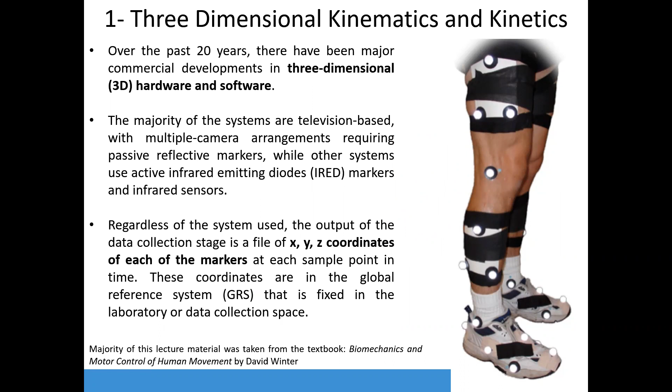So we need to have this X, Y, Z, and then we can find out the coordinates of a marker with respect to the system. And then I'm able to do all my calculations and analyze these markers' movement with the limb movements. Now, the problem is that when you look at the human musculoskeletal system...

Every limb would have its own coordinate system. Can you see this? So what I'm saying is there'll be a coordinate system for the foot, for the leg, thigh section, wrist, forearm, and then you have a coordinate system for all these body sections, right? And then you have a coordinate system of the leg.

So we need to, as I said, find a coordinate. For instance, if I'm interested in finding this coordinate about this axis, I can figure out maybe this is 2, 5, and 3, whatever. It's just a random number with respect to this.

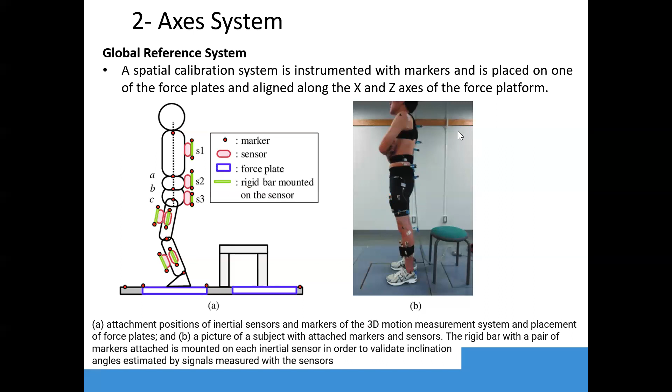We'll talk about sensors also sometime when you get time, but for now I was talking about this anatomical axis or the local reference system. Now, the local reference system or the anatomical axis system has to have its origin and also a principal axis.

So as I was telling you, the origin of the local reference system or the anatomical axis system is placed at the center of mass of the segment. Maybe I can go back again and show you what I'm saying. Can you see this? That's the origin of the local reference system, which is placed at the center of mass.

So if I'm talking about this segment, the center of mass would be here. I'm talking about this segment, and its center of mass would be exactly at the center.

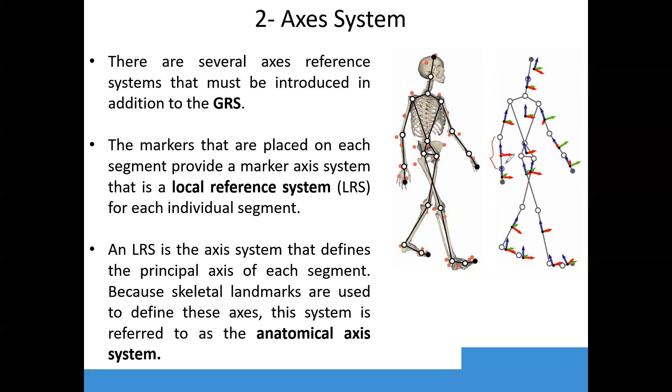The origin is kept at the center of the segment point. Now if you talk about the principal axis, let's say we're talking about the y-axis being the principal axis. This y-axis is usually along the long axis of the segment. So all those blue arrows in the previous slide denote the y-axis of the local reference system.

The principal y-axis is sometimes difficult to figure out. For instance, if you talk about the pelvis bone or hip bone, how would you determine the long axis? There, what we do is we try to join the PSIS and ASIS, the posterior and anterior spine points, the extremes. We take these extremes from the pelvis, connect them, and that becomes our principal axis.

So once we have those local reference systems, and we also have a global reference system, now we need to find a kind of mapping between global and local.

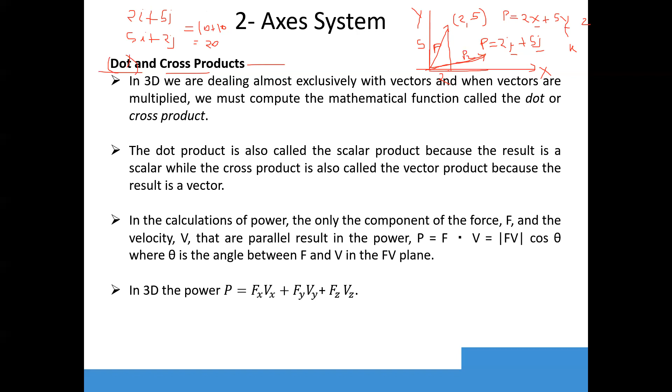But if you're doing a cross product, it's not that simple. For the cross product, let's move on to the next page. So for a cross product, I have to do something like this. Let's say we have those similar values where we had only i and j, 2 and 5, 5 and 2, okay?

Or let's say this time we got one more, k also there, okay? And let's say it is 1, 1. So when there's a matrix, we use this kind of bracket, but to find the value of the matrix, you only draw two vertical lines, and it's called determinant, because we are trying to determine the value of the matrix. So this kind of expression is called determinant A. Okay, I hope you understand this determinant.

So this is a determinant, and finding the values, the answer would be, as I said, again a vector. If you multiply two vectors in a cross product fashion, you get another vector. This time for i, you need to hide these two, and then multiply 5 with 1, and then subtract 2 times 1.

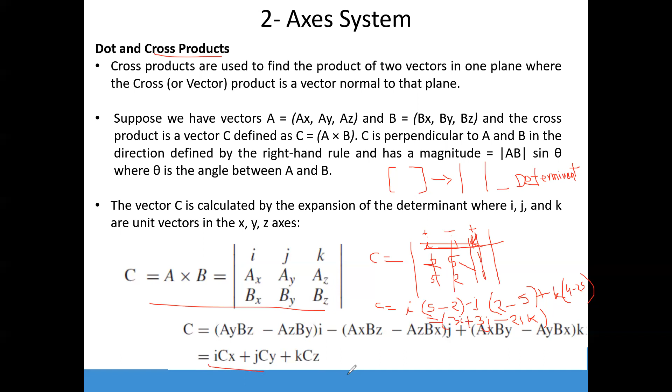So eventually what you get is a vector which can be defined as 3i plus 3j minus 21k. Simple, isn't it? Oh, I've got some examples here.

So when you have, let's say, force and velocity defined as this, like 2x plus 4j, velocity defined as x plus 5y, the dot product would be multiplication of 2 and 1 and 4 and 5, added together, so it'll be 22 clearly. Okay, but if you're trying to...

And then you do the same thing for when you're considering i. You cross out the rows and columns where you have i, so it'll be 5 times 1 and 4 times minus 3, and similarly, okay, and you get another vector.

Now with this discussion, you have become an expert in vectors. If someone asks you how do you know vectors or not, you can easily say that yes, we know the vectors, and we can also multiply the vectors.

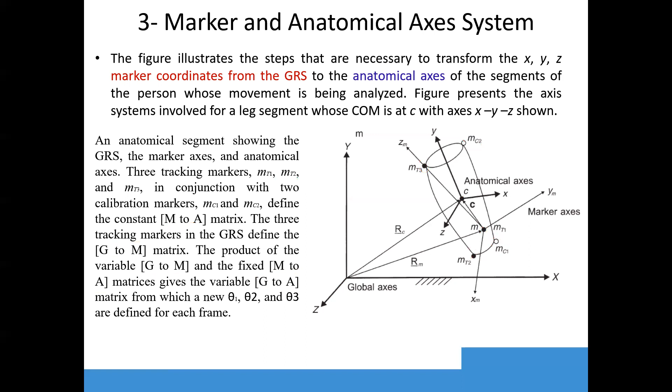It's the same story here, shown with this illustration, and it helps you understand that you have a global system, the marker system, and the marker axis. With this, you get the G to M matrix, let's say that's M1. And then from marker to calibration to the anatomical, you get the M to A matrix, let's say this is M2. Multiplying these two together, you get G to A.

So you can write G is M times A, where M is a multiplication of M1 and M2.

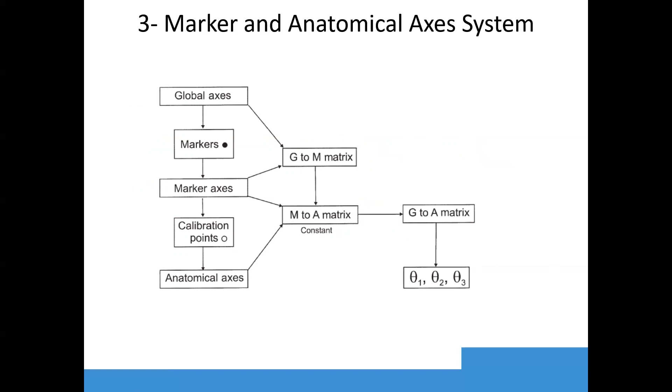So we do need these markers, the marker system, and the anatomical axis system information so that we're able to take whatever measures we've taken and put all these measures in one reference frame so we can compare them.

For instance, if you have a patient coming to you who cannot stand straight or whatever, with this information, using the markers' position, I can figure out where it relates to and where it should be, and then I can offset any displacement that exists with the disabled person.

Well, we were supposed to talk about the biomechanics. So this was all about the measuring. Let's talk about biomechanics that we wanted to study at first.

So there we actually try to find the interrelation that exists between the skeletal system, muscles, and joints. Essentially, we're talking about the upper limb. We may be interested in the shoulder joint, where we try to understand the clavicle, scapula, girdle, all that. Then it comes down to the humerus bone, then we have the elbow joint, and then we have the radius and ulna bones, and then the wrist joint and other bones.

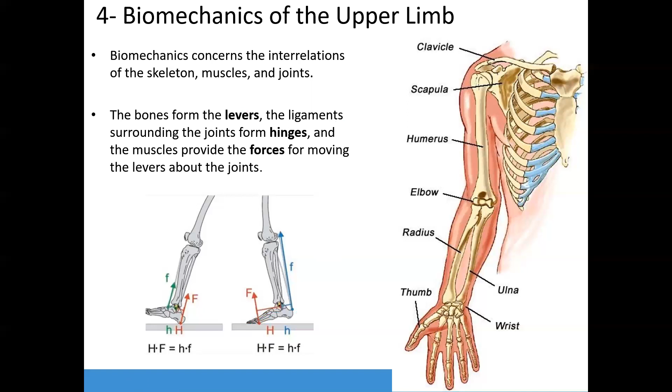These anatomical joints that I'm talking about are normally described in terms of degrees of freedom. For instance, if I talk about my elbow joint, I would say that because I can only rotate it, and that too in one plane, it has 1 degree of freedom. Of course, there's some abduction adduction as well, a very small amount, but we can probably neglect that. I'll talk about this, how much and why we can neglect it.

Now, for example, take your hand and grip. These interphalangeal joints, how many are there? They're again uniaxial, and because they can only move in one plane and one direction, they are again called 1 degree of freedom joints.

So why do we have this degrees of freedom concept? If I place something in space, it is said to be having 6 degrees of freedom, because something put in space can travel along x, y, and z directions, and it can also rotate about these axes.

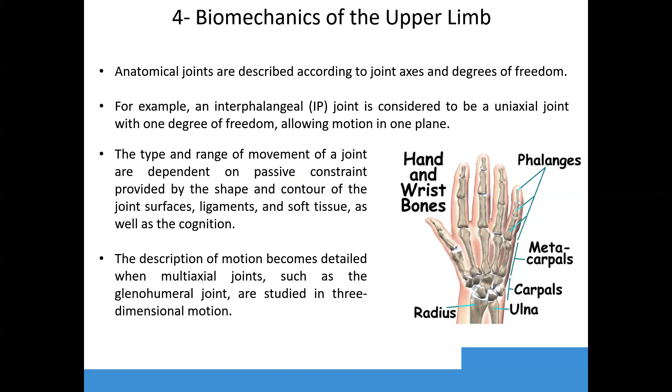Now, the description of motion becomes detailed when we talk about the multi-axial joints. For instance, if you talk about the glenohumeral joint, it's not easy, it's quite typically complex. Let's see here. This is your shoulder complex, which has both the shoulder joint and the girdle. So the entire shoulder movement is a result of the shoulder joint and the shoulder girdle.

Now, if you're talking about the shoulder girdle, it has clavicle and scapula. So the shoulder girdle comprises this clavicle joint, and there are 2 here, right? And it also has an ST joint, which is very difficult to actually explain, showing how your scapula glides on the thorax.

When you move like this, the scapula moves on the thorax, and this scapulo-thoracic joint alone has, I think, 5 degrees of freedom together with everything. So the SC and AC joints have 3 degrees of freedom each, so 3 here and 3 here again. Now the ST joint has 5 degrees of freedom, and it's very difficult to kind of quantify.

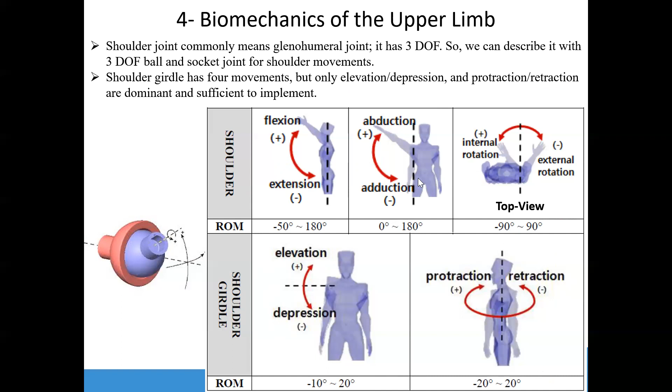So for instance, if I'm trying to use a robot for the entire upper limb, I need to look at the biomechanics. Here I've got 3 rotational degrees of freedom. I can only consider flexion extension here, and for pronation supination, together with this, I can also consider some abduction adduction. That should be fine. So we try to create such kind of equivalence with the exoskeleton things.

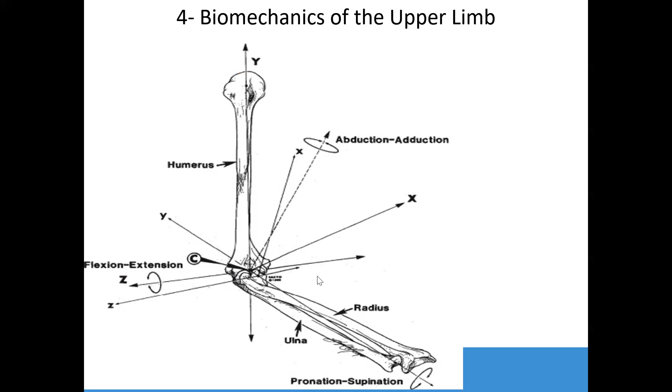So an exoskeleton creator should be something like this. Robots for upper limb rehabilitation are of 2 kinds: one is called an effector type of robot, the other is called exoskeleton. I'll explain later what effector robots are, but you know what exoskeletons are. Exoskeletons are robots attached to the human limb that have similar anatomy.

Towards the end of this lecture, we'll see some of the devices being used for upper limb rehabilitation. You would see the difference between the exoskeleton and the effector type of robots.

But essentially, any kind of robot that you're using for rehabilitation should be able to provide you the required motions of the upper limb, including the shoulder, elbow, wrist. For instance, the wrist motions can be both flexion and extension, and can also be radial and ulnar deviations. And you're able to move your wrist with pronation and supination with the help of the elbow joint.

When you talk about your fingers, they also give some degrees of freedom. As you can see, this distal, interphalangeal, and proximal ones - you get 1 degree of freedom at each of these. So that's how the total number of degrees of freedom for the hand becomes so large.

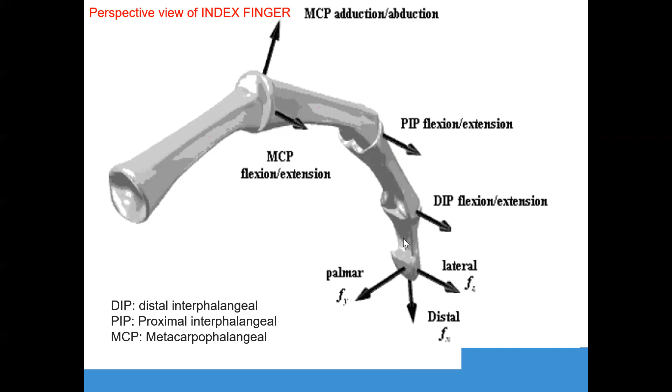So when we're studying the biomechanics of upper limb motion, we need to understand the difference between the normal arc of movement and the functional arc of movement. For instance, let's take the elbow joint, which has a normal arc of flexion extension from 0 to 150 degrees. And it can also give pronation and supination of 75 to 85 degrees.

Now, creating such kind of a robot is a nuisance. It's pretty difficult. We cannot create a robot that can give you such kind of flexibility. It's very difficult. And so, with studies, people have concluded that you don't need all this - you don't need the normal arc, whereas you only need a functional arc.

What does a functional arc mean? The functional arc is the one which should be able to provide you movements required for everyday life activities. So, for instance, instead of 0 to 150 degrees, you can only do with 30 to 130 degrees. So all you need is not 150 degrees of deflection, but 100 degrees of displacement from the robot.

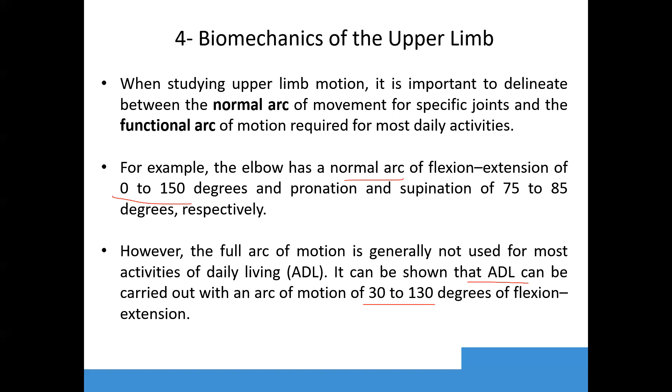Eventually it turns out that out of 150 degrees from 0, the functional arc would be close to 100 degrees of displacement.

And if you talk about pronation and supination, again almost equal amounts on both sides should be fine, like 50 degrees each. Instead of 75 on one side and 85 on the other, which makes 160 degrees, you could do with 100 instead of 160 degrees. So it's the same thing with forearm supination and pronation, because we normally use this for feeding or dressing tasks like tying a knot or whatever.

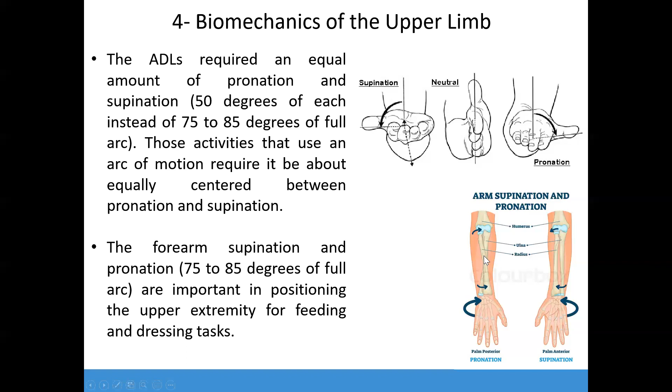This is for the supination and pronation. You can check and understand how, for different kinds of these tasks, the functional range is narrower than the normal range.

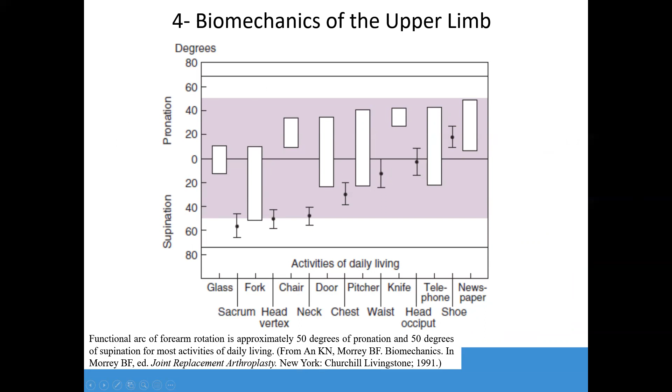Moving further, the wrist. If you talk about the wrist joint, it has a normal arc of, for instance, flexion of 80 to 85 degrees, extension of 70 degrees, radial deviation close to 20 degrees, and ulnar deviation close to 30 degrees.

So eventually they say the functional range of motion comes out to close to 70% of the normal or maximum range of wrist motions. Which means 40 degrees of flexion and extension, and put together radial and ulnar, you need 40 degrees.

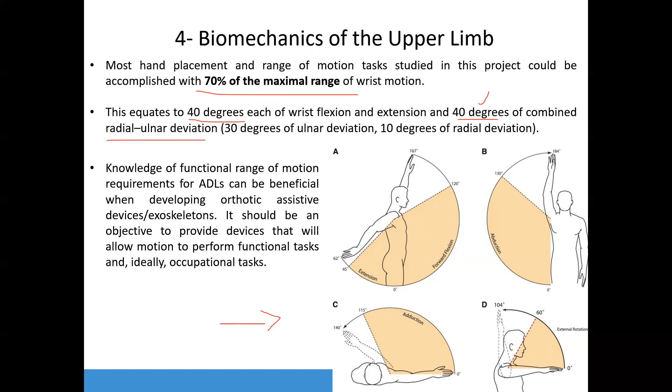And it's been shown here for the shoulder again - you can see how the functional space is less than the normal arc. For various tasks that you need to carry out, the shaded area shows that you need restricted movement and you don't actually use the full range of motion.

So during rehabilitation robot design, you can consider this, and that helps in easy design and comfortable use of these rehabilitation robots. Otherwise, sometimes if the range of motion is too large, and if you make an exoskeleton that goes far away, sometimes it's not possible to bring it back. And if it's not possible to bring it back, it's of no use.

We call it singularity postures. So there are certain singular postures or singular positions in the entirety of the workspace that we move our limbs around. We try to avoid those singular positions and points in the space, because if you take the robot to those positions, you cannot come back.

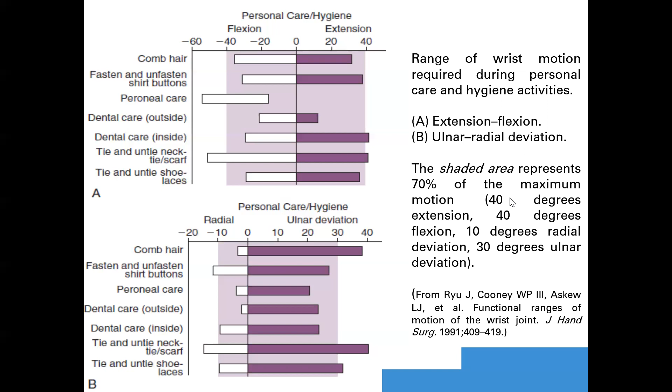This is also defined with the term called dexterity. I hope you know these terms - not all of you would, of course, but those who have difficulty understanding some of the terminologies we use here can try to read more about these definitions and try to understand.

So what happens once you have some sort of an injury? Injuries can restrict your motions, so for instance, a lesion on the upper motor neuron and then peripheral nerves may result in loss of volition control, motor control, sensation, and proprioception sometimes - the ability to balance yourself.

So once we understand the normal mechanics and the functional essential components of hand functions, there's something more that talks about special activities that need to be carried out, for instance writing or sewing, that also needs to be understood, because we need to interact with the patient and understand what exactly kind of work the person has been doing, and so what are the functional hand essentials for this person.

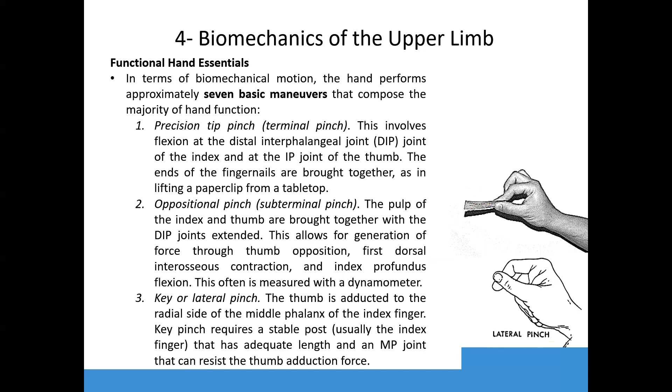And this is a lateral pinch, as you can see. You can pinch yourself sometimes to keep yourself awake.

And then you have directional grip like this, a hook grip, then a power grasp, and also a span or cylindrical grasp where the dip and the proximal interphalangeal joint flex to approximately 30 degrees, and the thumb is abducted. So these are those 7 functional hand essentials.

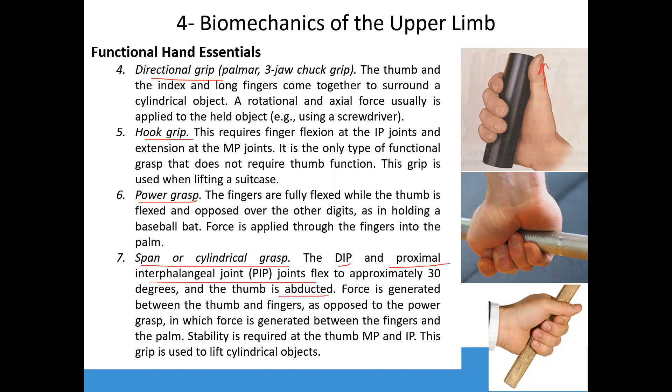But with injuries, some of these would get compromised, so even if you could work with just thumb and finger pinch and this palmar grip, you should be fine.

Upper limb stroke patients are normally miserable. They become disabled because of hemiplegia on either one side or both, and that results in weakening of the arm, and they cannot pick up or reach out or hold something. So the important goal for the person would be to improve arm movement and promote the recovery of lost functions.

Now what I'm talking about here is what happens when the person has a stroke. It eventually impacts the motor control. Rest you can do yourself. There's nothing important here, I can just skip. A few slides I'll be skipping quickly because it's for your information, and you can read and understand.

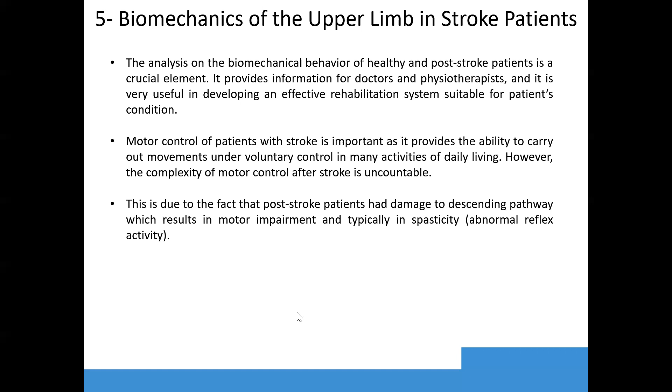So with the poor motor functions, what else? It may also reduce the sensory process, and so it makes it difficult to carry out all the everyday life activities.

Now the central nervous system is affected, and so the entire thing gets disrupted. The disruption would be in the form of restricted range of motion, loss of sensory functions, shoulder pain sometimes, and increased muscle tone. So muscles become very stiff and cannot move, and this results in pain.

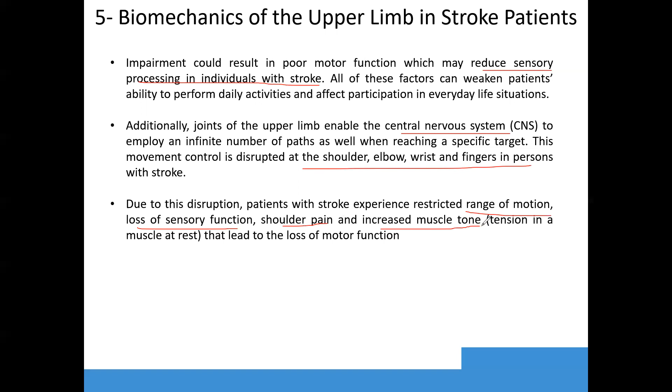Also, this is in terms of movements, and then in terms of torque, again, it is compromised. With the force applying capabilities compromised, the person cannot hold on to something, and so these are the basic motor functions that become compromised after a stroke.

Talking about the shoulder joint again, you have similar abnormalities that you come across, and so the major goal of rehabilitation would be the functional restoration of the person, reinstating the previous functions and strengths that the person had.

But I'm feeling like, okay, it's 11:25, which means we have done close to 1 hour. Let me come to a point where I can stop.

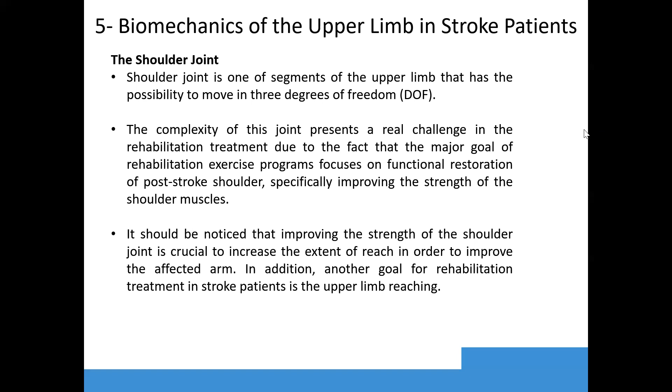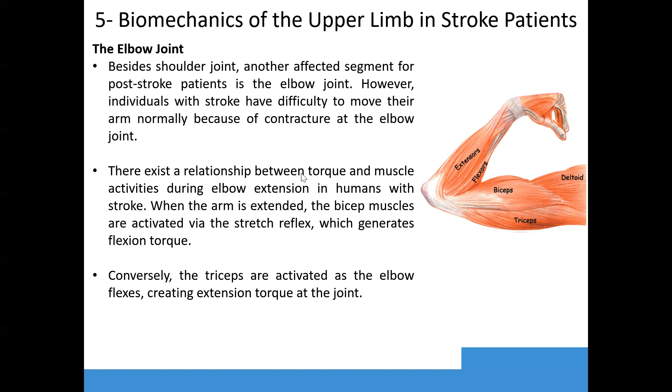And then of course the bones would be affected as well. I mean, bones are not affected by the stroke as such, but they're more affected due to muscle stiffness, and now you're not able to use the bones. So when you're not moving your limbs at all, this decreased use of your limbs results in osteoporosis, or sometimes it also results in bone resorption.

So while the bone was supposed to be absorbing calcium, it starts resorption, and it goes into the blood eventually. The calcium, instead of going towards the bones, goes out of the bones to the blood. So it does have an effect on the bones in some manner.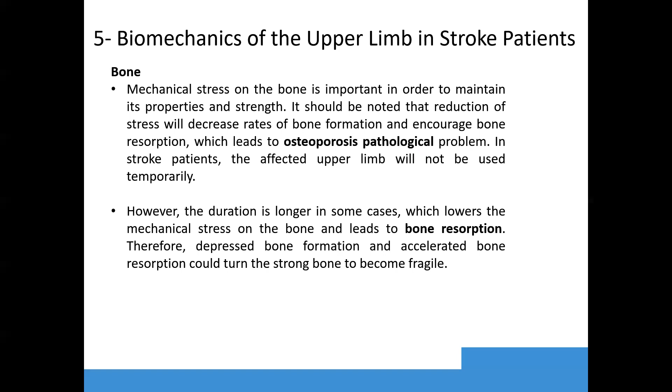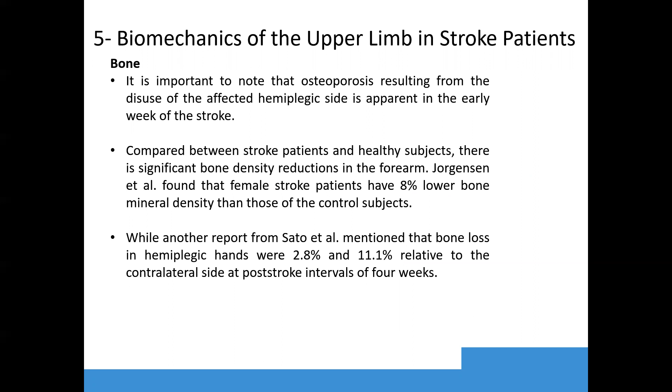So compared with a healthy person, a stroke patient would have significantly reduced bone density. It is found that there's an 8% reduction in bone density, with one particular case showing female stroke patients having 8% lower bone density. Another report mentioned that in hemiplegic hands, bone density reduction was found to be 2.8%, along with 11.1% relative to the contralateral side post-stroke interval. So in just 4 weeks, the bone density can go down to like 10 to 11%.

So the first thing is to rehabilitate the range of motion, and after the treatment called RICE (R-I-C-E), we try to come back to range of motion exercises as quickly as possible, starting from the wrist joint, so that bone degradation can be stopped.

But apart from the bones, even the muscles have an effect in terms of muscle atrophy, and the issue of bone resorption is again because of this muscle atrophy. So stiffness in the muscles was significantly higher than in normal humans. Obviously this is because of neuroplasticity being disrupted, and then the muscles are not getting any signal, so they become stiff over time.

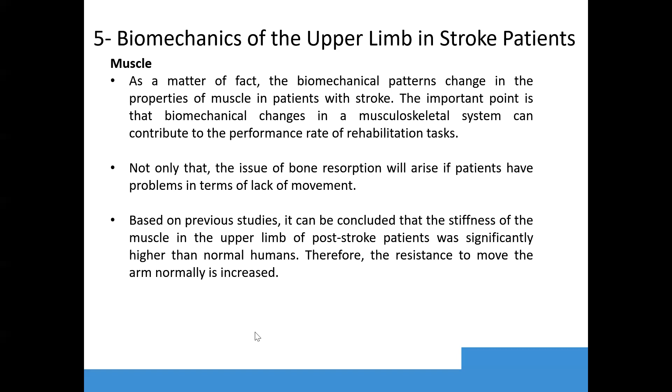So we also need to sometimes quantify how much the muscles are affected, and how much the cartilage is affected. The cartilage thickness will be decreased, for instance, and the only reason is the immobilization of the joint after the stroke.

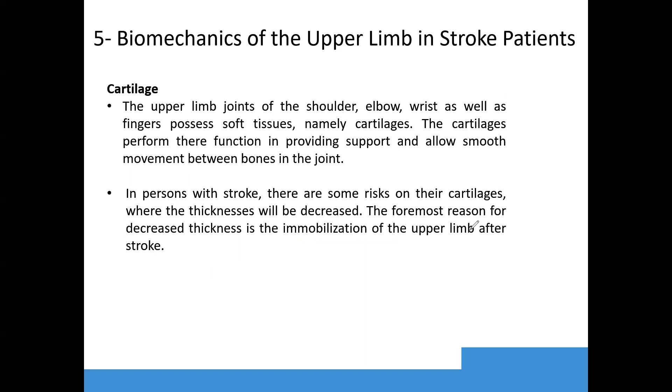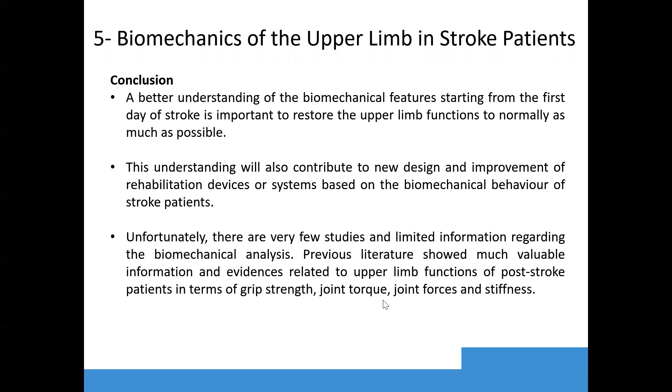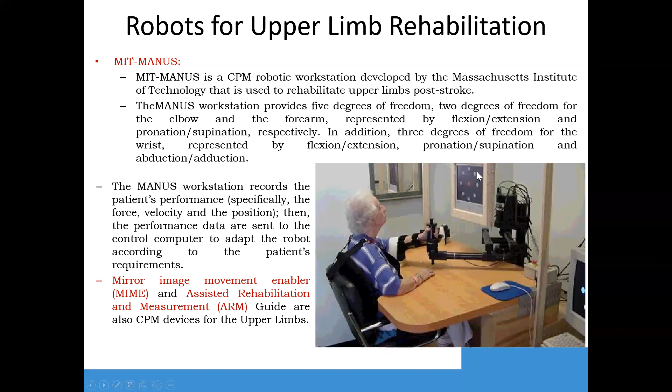There was some video for this. If you want further information, you've got the names of these devices - you can check on the internet. You'll find many interesting videos showing how these are working.

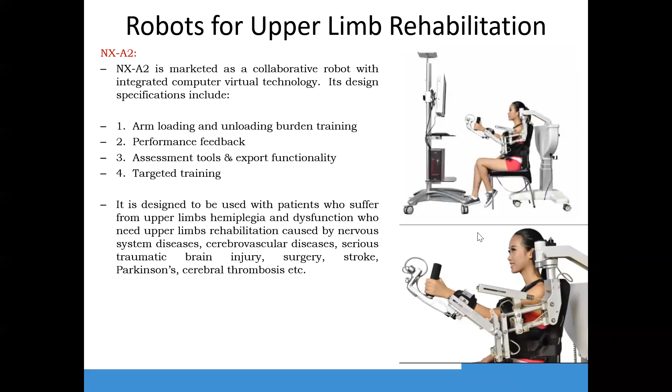Now this NX-A2 is very popular, and it's being used in many clinics. It's used for stroke and also for upper limb, especially, and also for the shoulder.

Now, the important thing is you can kind of use one of these joints - for instance, either you can use it for shoulder or you can use for other parts. So you can go for a selective rehabilitation, and it's basically an actuated one, so you call it active assistance. It's not a passive device.

So as you can see, it provides you with the wrist motions here. Apart from that, it also has this kind of a joystick which you can hold on to, and it has sensors into this joystick, so it also measures how much is your grip power. And then this part has two motors, so it gives 2 degrees of freedom at the wrist joint, one for the elbow, and 3 degrees of freedom for the shoulder joint.

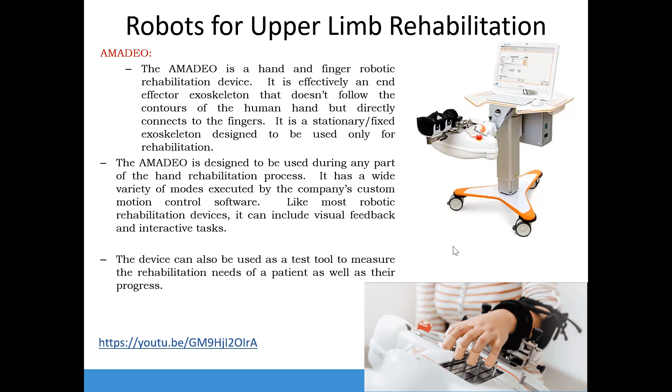So, all of these new names that you're mentioning to us, like Amadeo and some other robots that we just learned about today - they were the questions, one of the questions in the quiz, which I was really trying to see where I can find the answers or where to read about them specifically. Right, okay, yeah.

So it's nothing scholastic actually to find these devices. The information is all over the internet, but if you couldn't find some of these, don't worry, because even if I want to collect the entirety of information on these robots, it's not possible for me, looking at the variety of their characteristics - like some are passive, some are active. It comes with different degrees of freedom, which are those again. If you talk about the active ones, again, there's a whole lot of variety into those - there are end effector types, there are exoskeleton types.

Maybe I can show you sometime - I probably have 3 review papers on this. I myself have written 3 review papers where I was trying to put all these devices into a paper, but still I could not discuss everything. And by the time you finish your review and have a paper, there are more devices being offered, and people all over the world continue working on these things, and whoever comes up with a new design will try to publish or maybe advertise on some magazines, on internet otherwise.

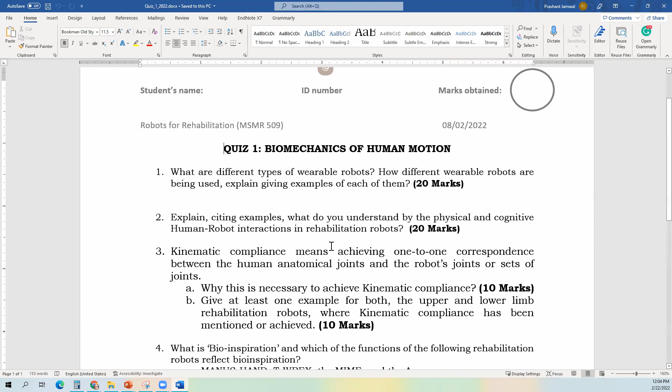So you're talking about question 4. I wasn't sure if we are. So what is bioinspiration, and then which are the functions of the following robots? Like MANUS, we just saw this, right? T-WREX, MIME, ArmeoSpring, and ArmeoPower. For that you need to actually read and understand what these robots are, and whether they talk about bioinspiration or not.

Yes, because I think the question was a little bit confusing, saying which of the functions. It was categorized A and B, so I didn't know if I have to choose A or B, or should I just talk about each of these robots. Sorry for not being expressive - here I have all upper limb robots, and here I have a few of those lower limb robots, and I wanted you to find in these robots what kind of bioinspiration is used.

So these are all rehabilitation robots, and I was asking you to reflect on the bioinspiration being used in these robots, whether or not bioinspiration is used.

Okay, so I totally misunderstood. That's okay, no problem. As I said, this is not the first and last quiz, and the quiz is not the only evaluation that we would do. Once again, don't worry, I'll be more liberal, because I know this being the first quiz, I may not have been very expressive, so it's fine.

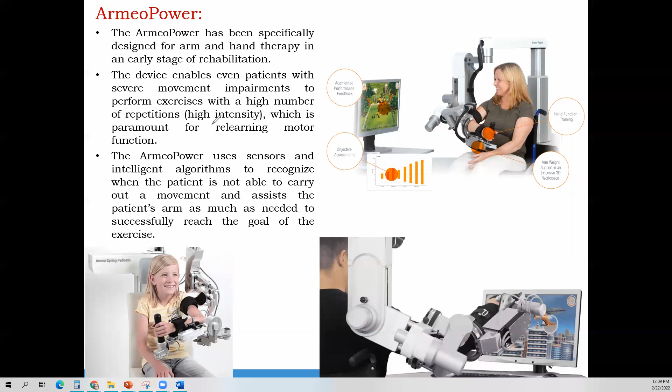So this ArmeoPower, as I was saying, they use this kind of bioinspiration in their control algorithm somewhere. Let me read through - so they use sensors and this intelligent algorithm to find out how much the patient is not able to carry out, and to the extent the person is not able to carry out further motions, the robot would assist it.

So this is the kind of robot, as you can see. It has one, two, and there's one more here. So it gives 3 rotation degrees of freedom at the shoulder, 1 for the elbow, and 2 for the wrist.

And then it has this interactive screen where they can see. This is the back side rear view, and this is the front view. They can see it more clearly.

So it does hand function training and arm weight support, because it's quite heavy robotic device, so it has to be compensated. Their motors first compensate their own weight, that kind of actuation, and then from that point they take the hand motion further on top.

So let's say to keep the robot in a particular position, they need maybe 10 Newtons of force, and then to move further they need another 2 Newtons. So that's how they control their robot.

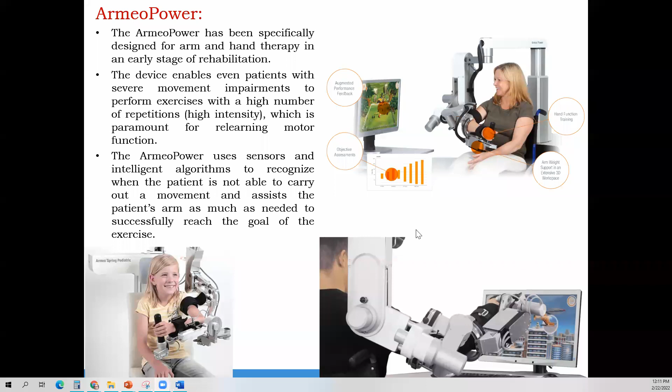So the previous slide where I had those URLs from their websites, there you would see those 3 versions of Armeo, from Hocoma company: ArmeoSpring, ArmeoPower, and there's one more that's again a passive device. It helps in kind of alignment.

This is again very interesting one. ExoGlobe, not ExoGlobe - ExoGlobe is a different device, but this is ExoGlove, and then a pro version of it. So it's just a glove. It's not an exoskeleton, but it can help in grasping something, for the hand motions, basically wrist and hand motions.

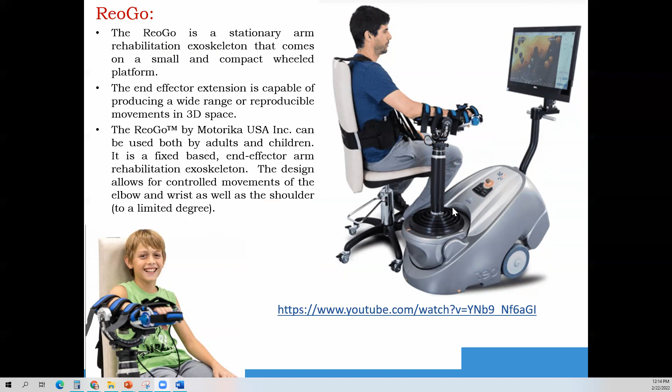So it helps you, once again, for focusing on the wrist mostly. What happens, specifically in stroke - post-stroke - mostly the movement has to be started from the wrist joint. So wrist is the main focus for therapy, and we start from the wrist and then go for the rest, like the upper limb part.

So it's a battery powered device, and it can run for an hour after charging. It can check how much force and motion the person is able to apply, and then make an assessment - whatever is the deficit, they would provide feedback on that deficit.

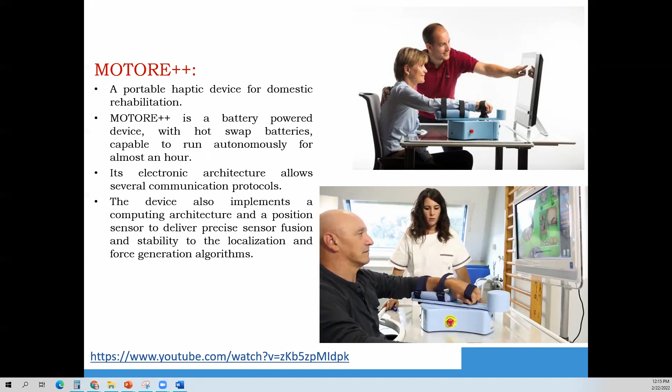It's an improved version. The previous version also - I think the video which I have is for the previous version, but it's quite explanatory. Watching this video would help you understand more about it.

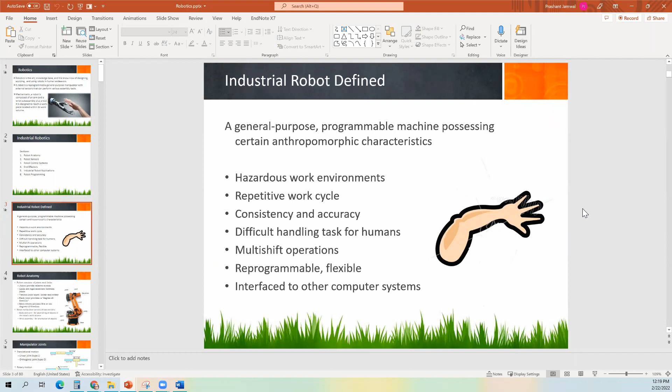So I'll go very quickly. We use robots for repetitive functions and activities which are hazardous. Normally a robot would have joints and links. These are the joints, and between the joints, what you have is called the links.

There are two sections, body and arm, and the wrist assembly. This is the end of the arm, sometimes also called the wrist assembly, and the remaining part is the body of the robot.

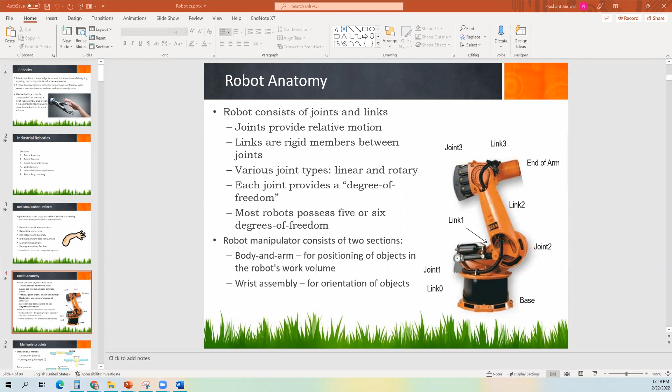Okay, let me go full screen. That makes it much easier. Yeah.

The robot joints can have various kinds of motions. For your information, the joints can move linearly like this, or orthogonally, like this input motion moving at right angles, which is called an orthogonal joint, denoted by O, while linear is denoted by L. A rotational joint is denoted by R. A twisting motion is denoted by T, and a revolute joint is denoted by V.

This goes like this. So when you rotate this, the entire thing goes like this in a circle. So that's a revolute joint. There's a difference between a rotational joint and a revolute joint: this is R and this is V.

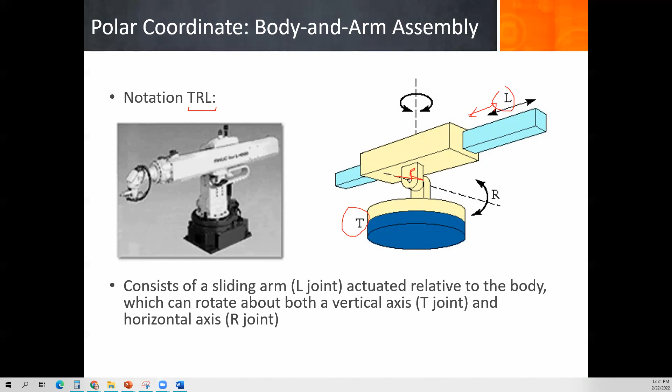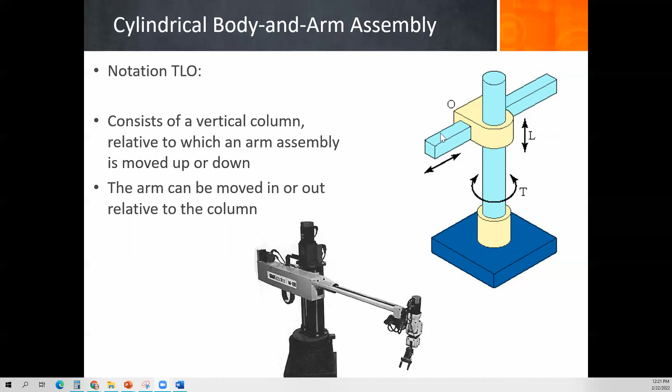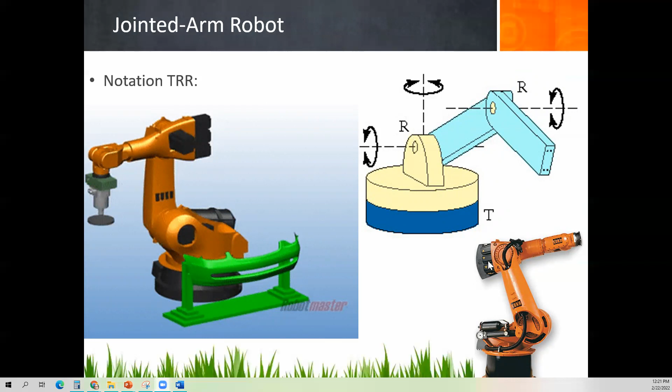For any kind of robot, we use such terminology. So if a robot is defined as TRL, you know it can give you a twisting, a rotation, and a translation such as L. This is how we normally define a robot. So: twisting, linear motion, and this is also linear but orthogonal, so it'll be TLO. This is L, this is O for orthogonal, and this is also O, so LOO. This is twisting with a rotation and rotation, so it'll be TRR. Likewise, you have many such combinations and definitions.

So the wrist assembly is the end of the arm, end of the robot. We normally have tools attached to this wrist, and it can have three motions called roll, pitch, and yaw. A roll motion is this, you can see. For pitch, it can go downward or upward like this. So roll is this, this is pitch, and this is yaw - about this axis, whatever movement occurs is called yaw movement.

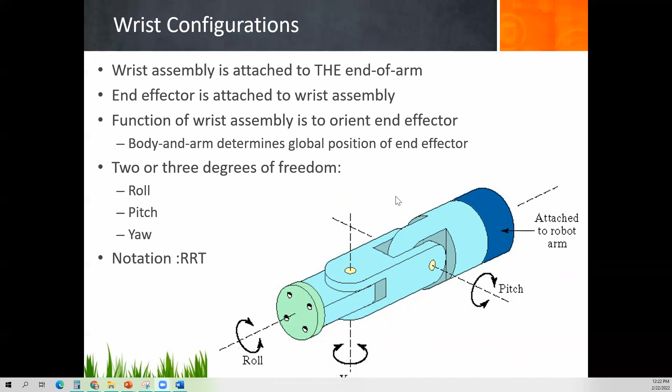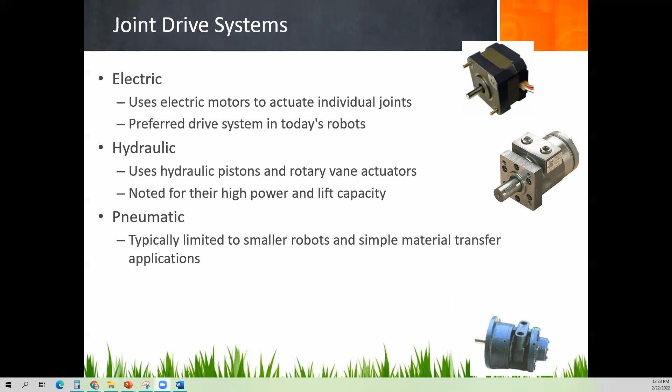We can have actuators to move robots, and these actuators could be electric, hydraulic, pneumatic, or other. These days we have very unconventional kinds of actuators, which we may not discuss because it's out of your context and scope.

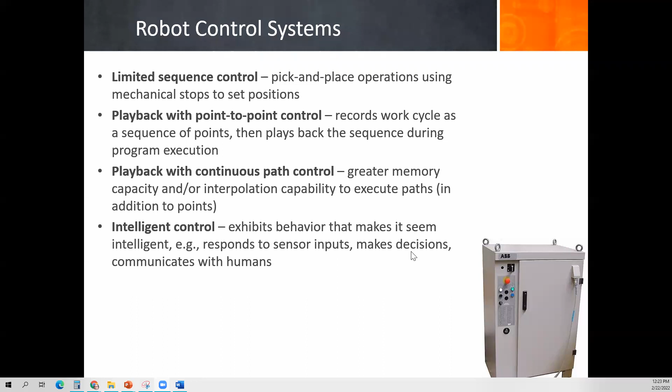There are various control systems used, and for robots we normally use something called an intelligent control system that takes sensor inputs and previous history, and the controller has to make a decision on further actions. But don't worry about the robot control.

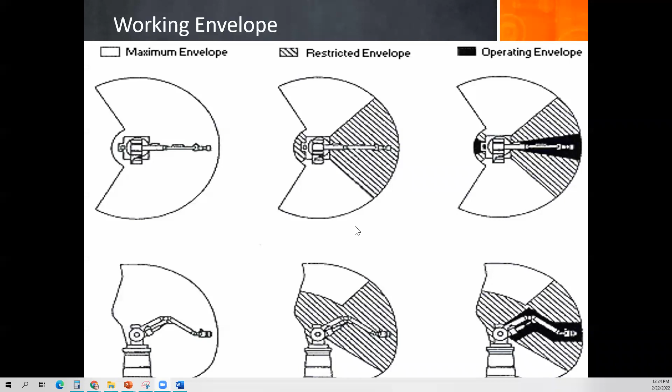It has a coordinate system like we discussed for our human systems. So it has a world coordinate system, which is the global reference system, and then it has local reference systems. These can be mapped together, so from global reference system to the local reference system we can create a mapping, and find out how they're related.

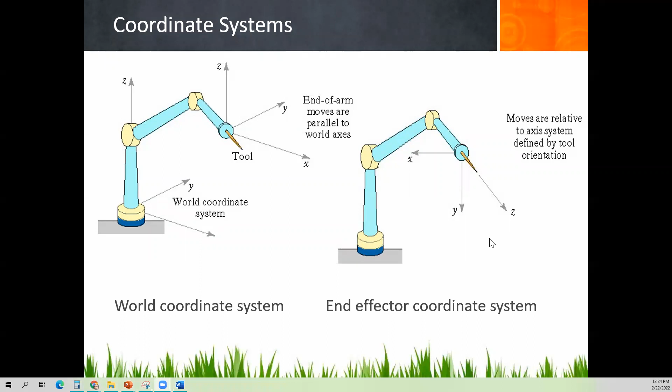It is shown how the workspace of a robot looks like. The circles that you see here show where the robot can actually reach and where it cannot. Outside this sphere, it cannot reach. So the workspace of this robot is a spherical workspace.

This is regarding coordinate frame transformation, which I was talking about, from global reference frame to the local reference frame. You don't have to go into the theory of it, I'll quickly go through.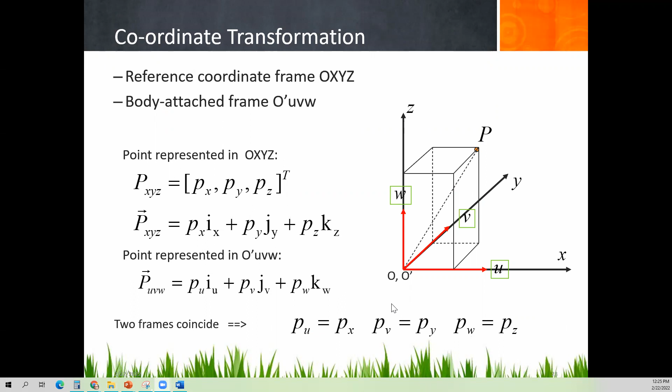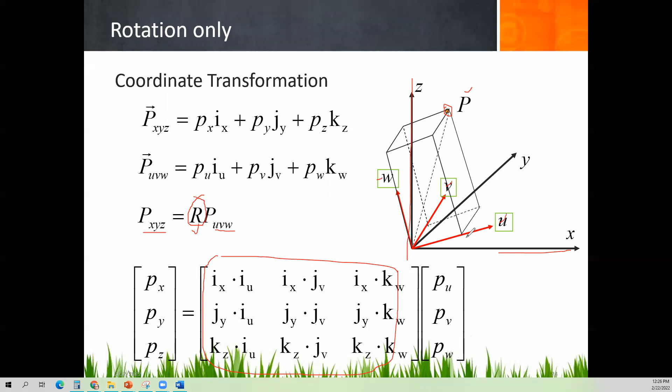For instance, if there are two coordinate frames, one is XYZ and the other is UVW. Now UVW has been rotated by some angle. If it has been rotated by some angle, we can find a matrix by which, if you multiply, we get coordinates in UVW with respect to XYZ. Or if there's a point P and I know its coordinates in the UVW coordinate system, multiplying those coordinates with R, I can find the coordinates in X, Y, and Z. Quite simple, isn't it?

Sometimes the coordinate systems are translated and then rotated. So if there's a local reference system and you want to map it with the global reference system, I'll bring it here - that's a translation - and then align with it, that's a rotation. So there are two things required: translation and rotation, and then the local reference system can be exactly overlapped on the global reference system.

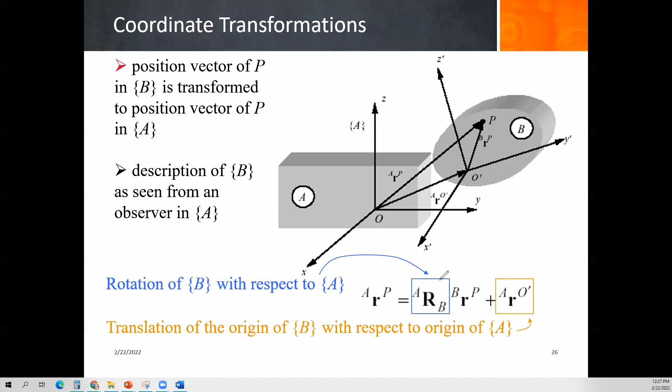So the matrix I was talking about, that magic matrix, has two parts: a rotational part and a translation part. Put together, these two make one matrix, which is called a transformation matrix. So it has both the rotational part and the translation part.

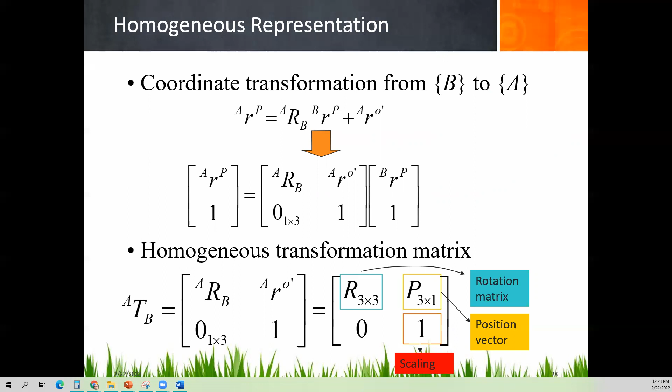The sequence of rotation and translation does matter. For instance, if I add 2, 3, and 5, I get 10. And if I add 2, 5, and 3, the result is still the same. Or if I add 3, 2, and 5, the result is still the same. But that doesn't hold true with rotation, with angular displacement. If I take my mobile and rotate it about the x-axis, then y-axis, then z-axis, I get a certain position. But if I change the sequence, the resultant position would be different. So that's something important.

This is your local reference system, this is your global reference system. For local reference system to global reference system, if I need to find a mapping, I'm trying to find a magic matrix by applying which it'll give me the coordinates in the global system. So what I need to do is try to make it overlap the global. This is called a transformation matrix, which will relate the location of a point in the third reference frame with the first reference frame.

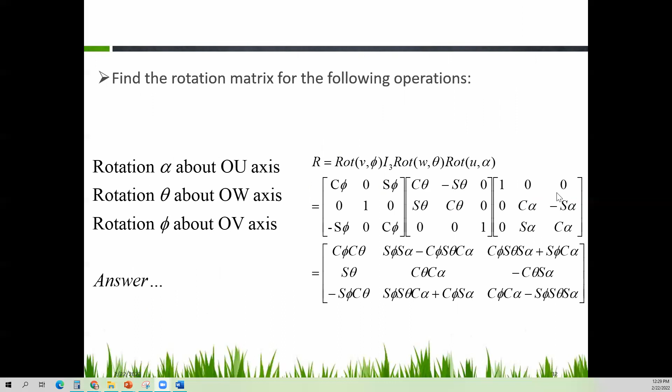If you rotate about the x-axis, y-axis, and z-axis, those were those matrices and they can be put into one - don't worry about anything. Here's an example, a quick one, to show you what I'm trying to say.

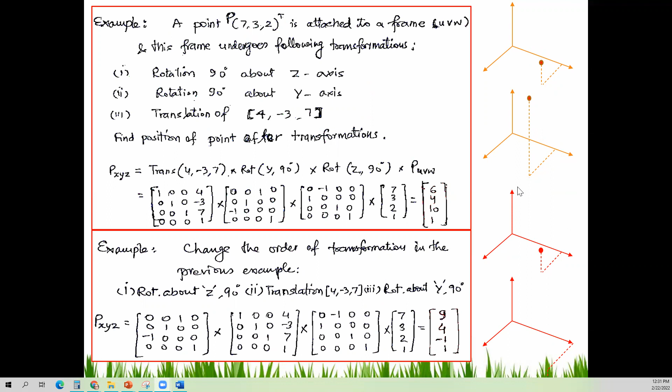But if you change the order by which they've been transformed, like you rotate about z first, then translate, then rotate about y, it becomes a different thing, it goes somewhere else. So the only objective here is to show you that the order by which we rotate these matrices changes the end position.

Here I was talking about the degrees of freedom. I already told you that a point in space can have 6 degrees of freedom, and the degrees of freedom are translational and rotational. Sometimes they can be together.

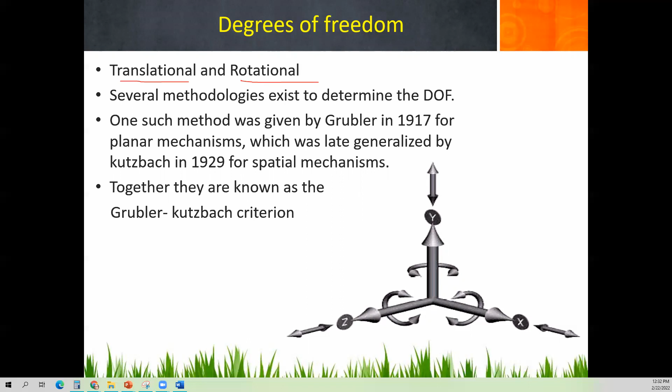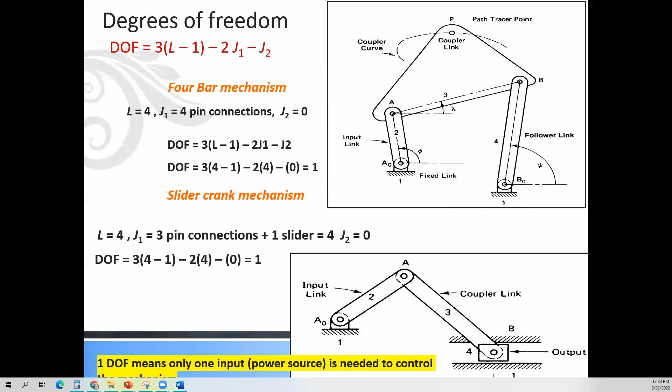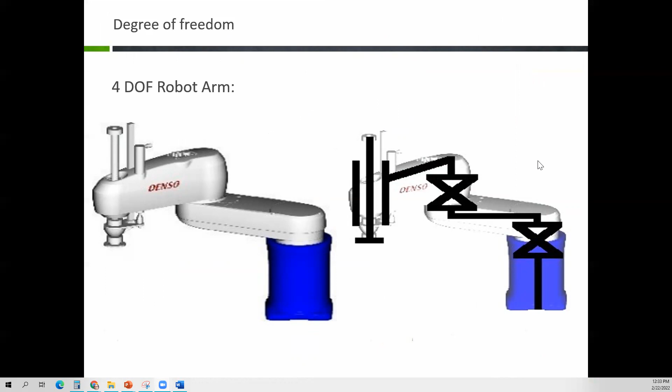And then there are some difficult calculations on degree of freedom, you don't have to worry about it, this is only for your information. This file is not supposed to be in your scope of course. We normally use this for teaching our students in robotics, so I'm just using it.

There's another thing which is interesting. Sometimes people use it in rehabilitation robots. When you read the papers you would come to know about these terminologies. So for instance, you have such kind of a robot.

So this robot has link number 1, 2, and 3, and joint number 1, joint number 2, and this is your end effector, which can also be called joint number 3. So this makes the entire robot.

Now sometimes I know what is this L1, L2, and what are the angles. If I know these angles and the lengths, I can determine with the coordinate system, I can find out where this point is, I can find out the coordinates of this point. This is called forward kinematics.

And at times I'm given the coordinates of this point, and I need to figure out how much is the length of this, and what are the angles. So this is called inverse kinematics. When you move forward, it's called forward kinematics; when you move backwards, it's called inverse kinematics.

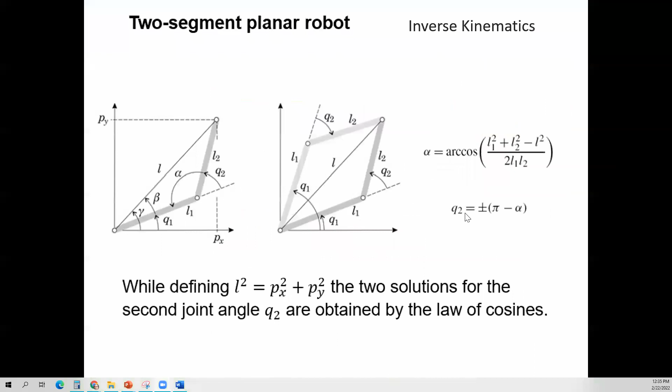So for the next few slides, I'm talking about this forward kinematics and inverse kinematics, which should be, I mean, you just need to know that these are the terminologies, and sometimes you may come across these things.

Talking about this workspace of a robot. So for instance, if you have a robot which can have translation when it has 2 links, and these 2 links can move like this, this will be the workspace, and we call it a planar workspace because it's a 2-dimensional plane.

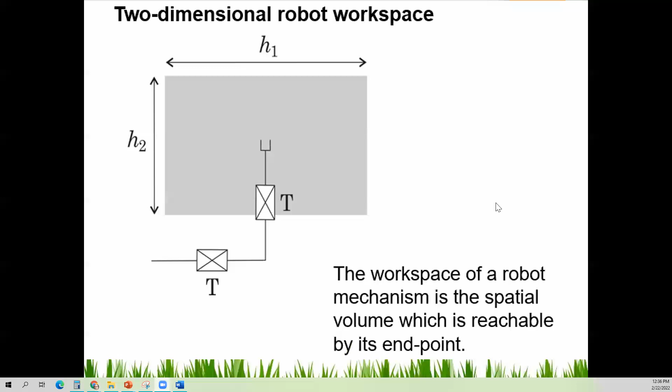So a 2-dimensional workspace can be like a circle or a disc, or it could be annular kind of thing, because this link can go around and can go like this. So this is the area where this end effector of the robot cannot reach, because it can go like this.

So this unshaded area is the one where it cannot reach, and the shaded area is its workspace, and otherwise, which is not shaded, it's not its workspace.

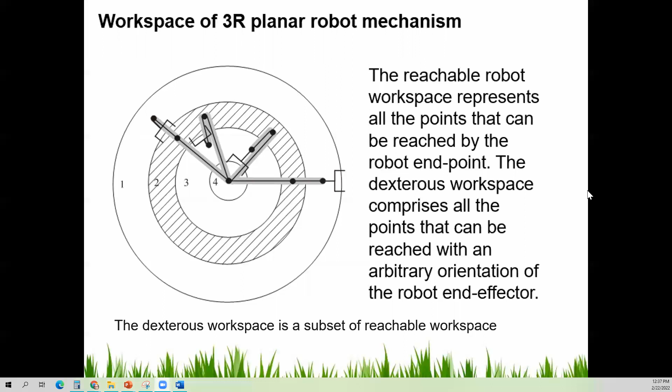Yeah, there are calculations that can be done. For instance, this robot has reachable workspace, so it can only reach the shaded area. Similarly, this workspace can be a three-dimensional workspace.

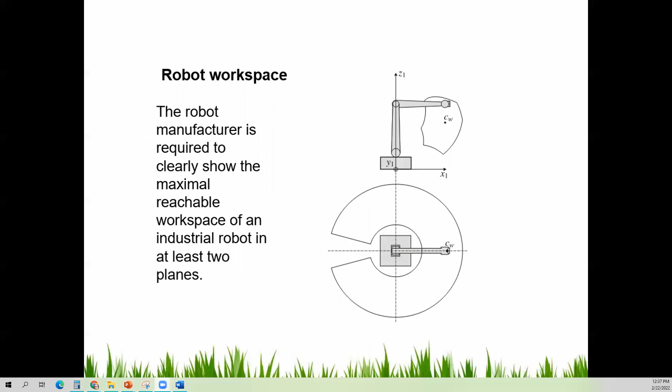I think I should stop here. You already know how much you should know about the robots. So what we didn't talk about is the different kinds of motors, but you don't really need that information. It's working information that you needed, and I think you have it now.

For your interest, I'll share these slides with you as well if you want to go through them. It's only to help you understand the various literature that comes with rehabilitation robots. Apart from this, I had shared a file on vectors, which gives fundamental information on what vectors are, how we can add, subtract, and multiply vectors. This information is normally required for carrying out certain experiments in the biomechanics lab. Though there is software which can help determine these things, you should know the basics of vectors, matrices, and determinants.

So, this is all I have for today, because I don't want to start a new topic, so it should be fine. If you have questions, we can discuss. Also, I need to know if what we discuss here interests you or not, or if there's anything other than this you'd like.